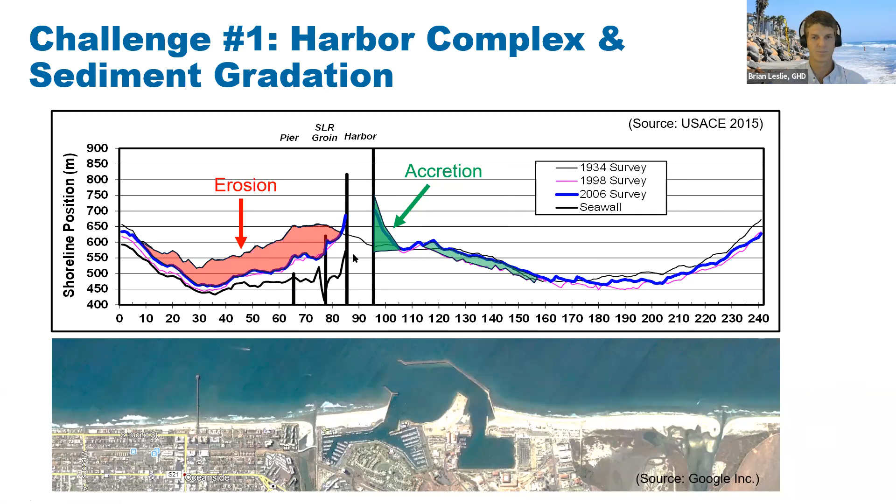Related to this challenge of the harbor complex and its impoundment of sediment is sediment gradation. Sediment gradation is really important to a beach and to having that recreational dry beach in particular. Coarse gradation sand is what you find on these dry beaches. It's heavier, bigger diameter particles that are not as easily moved by waves. Fine sand exists below the mean lower low water, so in the surf zone and near shore, where the wave and current velocities are less, so the sediment drops out.

So what we see in Oceanside is that coarse grained sediment is not making its way down past the harbor. It's not making its way to city beaches. The fine grained sediment dredged by the Corps each year is adding to the beaches, but it's really only adding to the submerged profile, the surf zone and near shore profile.

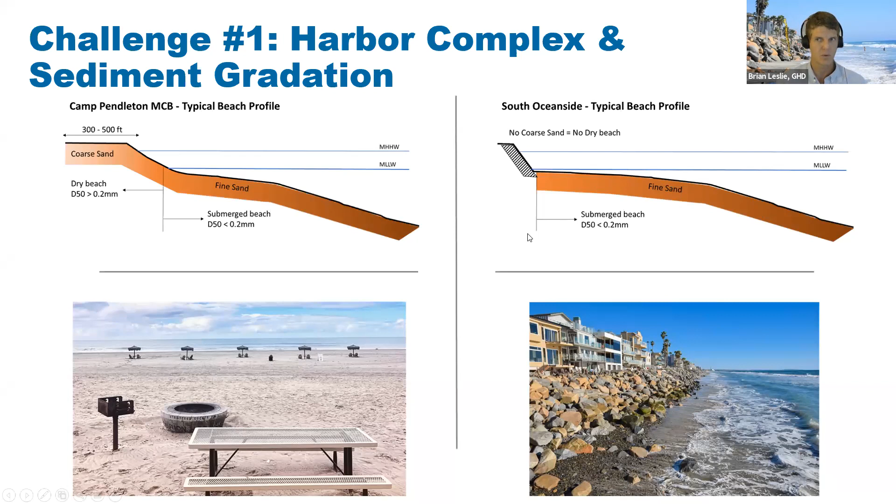So more on challenges around the Corps' maintenance dredging program in challenge number 2. There's a number of things going on with this harbor dredging program that creates challenges. We found that the sand from this program does little to really benefit the city beaches. Several reasons for this. First has to do with sediment type, which we just hinted on. A lot of fine-grained sediment is coming out of these navigational channels. With beach building, size of the particle matters. The coarser sediment stays on the dry beach. Finer grained sediment moves offshore and into the surf zone and near shore.

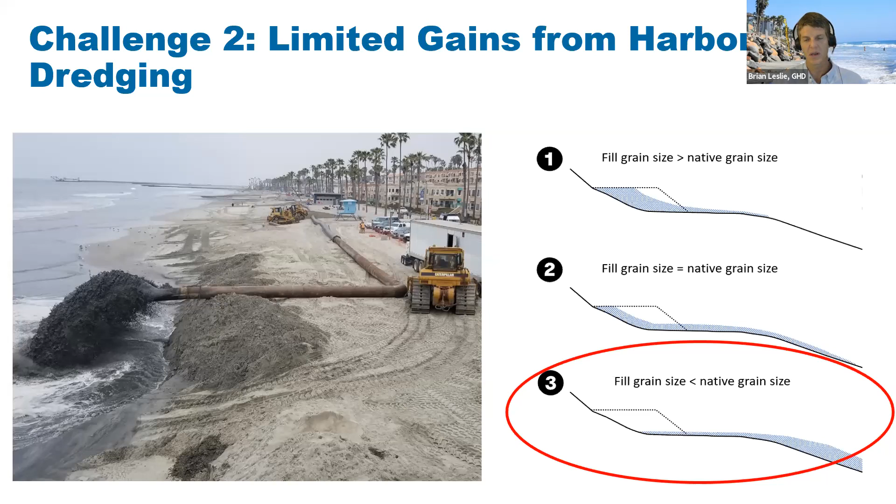Related to this, but definitely secondary, is the placement method. Every year, the Corps places the material in the surf zone via this pipeline slurry mix, which is about 80% water, 20% sand. The slurry is allowed to flow freely into the surf zone and then is scraped up by dozers immediately downdrift. Typical beach nourishment projects interested in beach building have training dikes that act to slow the water velocity and have the sand drop out on the beach, and then manipulate the sand into a profile. The Corps doesn't do this for a number of reasons, but it's a contributing factor to why these gains don't happen from the harbor program.

The other big challenge, or reason why we're not seeing a lot of gains from the harbor dredging, has to do with the timing and placement locations. So sand is placed typically within the spring. They dredge in the spring and place within these variety of locations.

They struggle to make it too much south of the pier, but this is coincident with the change in the wave climate. The climate changes from a north dominant swell direction to a south dominant swell direction. So these waves are pushing sediment to the north during this period of time. So what you're seeing is kind of like the circular flow of sand within this northern segment of the city, and you're not really seeing the benefits to the south.

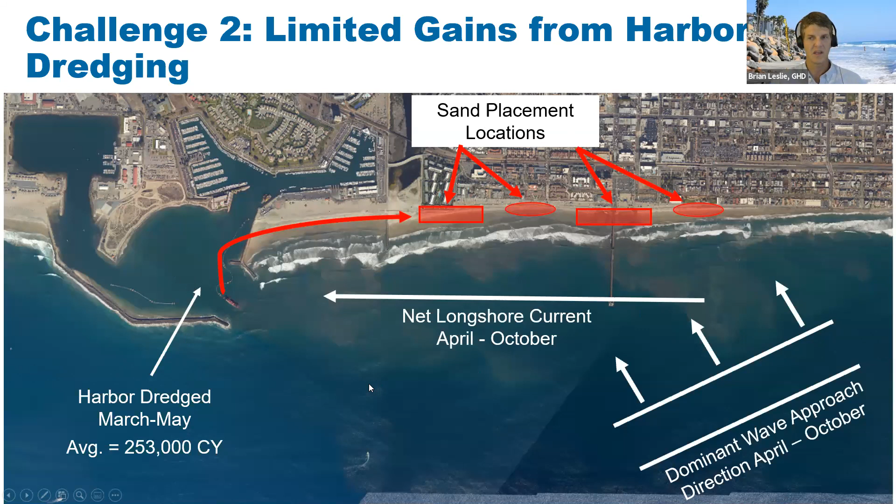The third challenge we came across was a poor performance of the regional beach fill program. The regional beach sand project, carried out by SANDAG in both 2001 and 2012, brought really great sand to a lot of beaches within the county. And Oceanside was no exception.

In 2001, the city got 400,000 cubic yards of sand. And in RBSP2 in 2012, the city received 300,000 cubic yards of sand. Really coarse, good sediment, so good for building beach space. So this is just kind of an intro to that project, and then we'll get into how these fills performed over time.

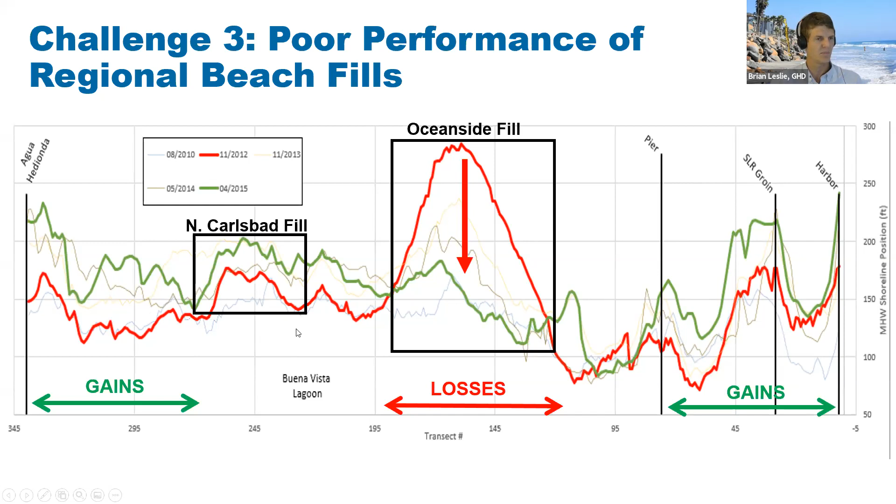So there's some gains in the harbor area, Harbor Beach, and by the San Luis Rey Groin, but also significant gains within the North Carlsbad area. Those gains are still actually being realized in Carlsbad. It seems like the beaches are still benefiting from that fill 10 years later.

A closer look at that area and why we think that's happening. What you have at Carlsbad is these jetties at the Agua Hedionda Lagoon, which effectively act like groins in interrupting sand transport. So the coarse grained fill would basically move down the coast and was retained by these jetties.

Beaches in North Carlsbad, like I said, are still benefiting from this project. 10 years later, we're seeing this accretion of about 3.6 feet per year since 1990. I know this is generalized across that time, but again, these beaches are doing really well. And it's kind of a nod to how retention can act within this system.

The fourth challenge is really kind of a softer challenge in that the city, like other coastal cities, has difficulty in reaching social, political, and regulatory consensus around management decisions. And so this is not the first study to look at and recommend sand retention as an option for Oceanside. It's actually like the fifth or so. Challenges and competing interests amongst the community, stakeholders, and resource agencies have precluded sand retention from moving forward.

The experimental sand bypass program, which we've talked about in past meetings, was a result actually of a sand retention option, this preferred groin option that was put forward by the Corps in the 80s, being shot down by the community and political and regulatory constraints. So the experimental sand bypass project was a compromise, and this 9 groin option was preferred. And this system, as everybody probably knows, was deemed a failure after a few years. And that was a result also of entities not working well together.

So this project was not able to touch the Marine Corps property or impact their operations, which really tied the hands of the project team of where they could source the sand. So this led to the project sourcing sand in the surf zone off of the North Breakwater. And this was an area that didn't recharge with sand very quickly. So that was one of the major constraints of this project and why it failed.

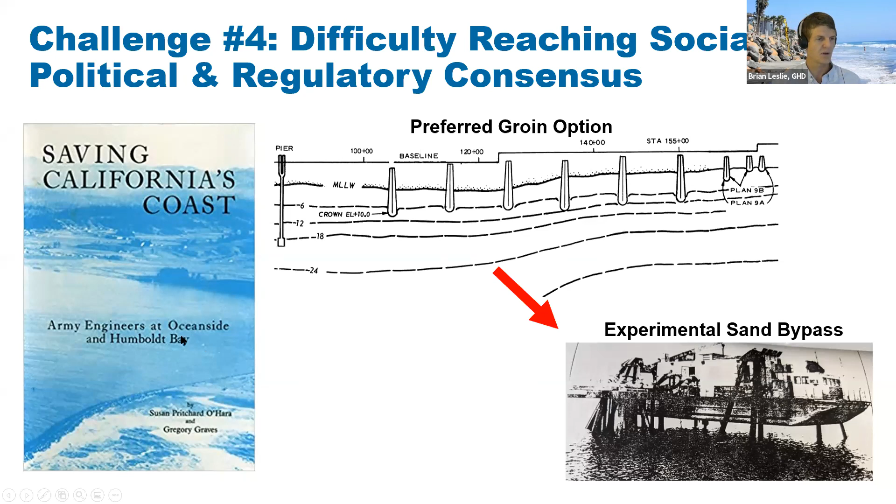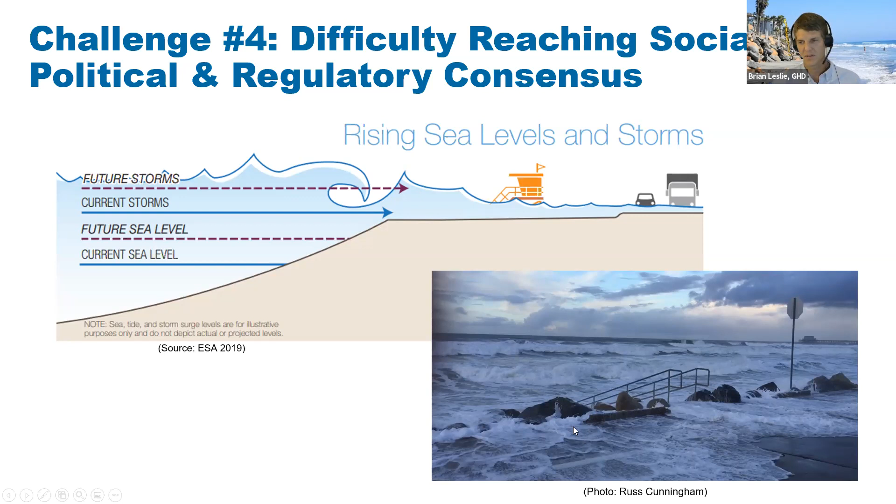And we totally get the difficulty in making these decisions within these coastal communities. There's trade-offs with each of these options. There's big costs sometimes, and there's difficulty to predict some of these impacts with accuracy. But given the state of beaches today in Oceanside and sea level rise projections moving forward, it really seems like we need to work together to build resilience in these communities and start making these tough decisions. Continuing to do what we've always done is not going to sustain our beaches.

Okay, so on our project and our project approach, and recognizing these project challenges, we've designed it to start small and build with success. So we've got this pilot project approach. We want to be adaptable and reversible, so designing with that in mind so that we can offset impacts.

The project would be informed by a robust scientific monitoring program that we've already started to spin up, that Laura will talk to you about in a second. So we've got a baseline established and the citizen science program that Laura will speak to. And off to you, Laura.

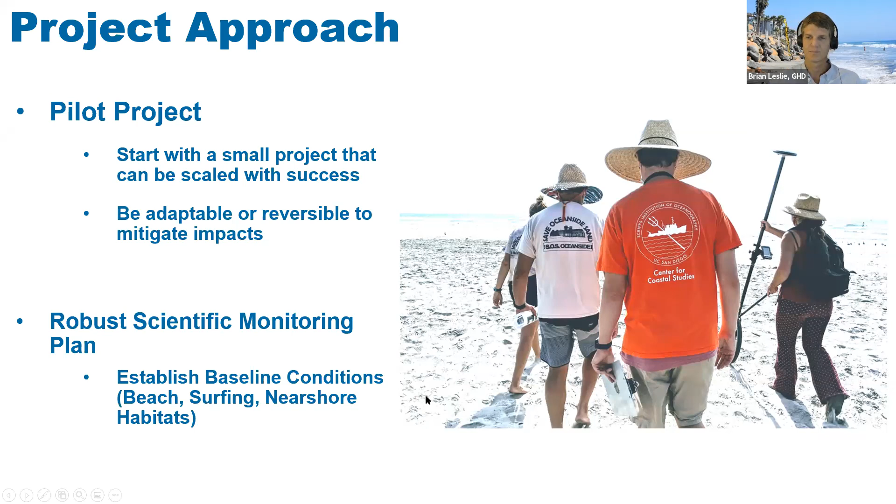Great. Thanks, Ryan.

So from the Scripps perspective, we've been looking at what kind of information we can bring to light in terms of what the baseline conditions are at the Oceanside beaches. As an institution, we have expanded our capabilities of doing shoreline surveys all the way through North County more recently. And so we now do quarterly or biannual surveys through Oceanside using our LiDAR, laser detection system that essentially provides high resolution surveys of the beach area.

And then to supplement for this project, we did bring a crew up in January of 2021 to get the surf zone and the nearshore area in addition to the LiDAR so that we could really get the full beach profile in terms of a baseline condition. So that was provided to the project team. And we will continue to do the biannual spring and fall LiDAR surveys through Oceanside to continue to track change there. I think next slide.

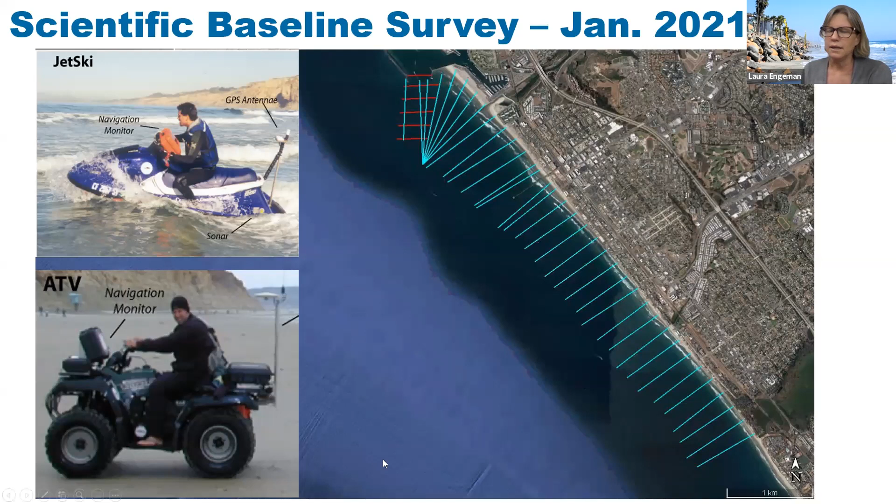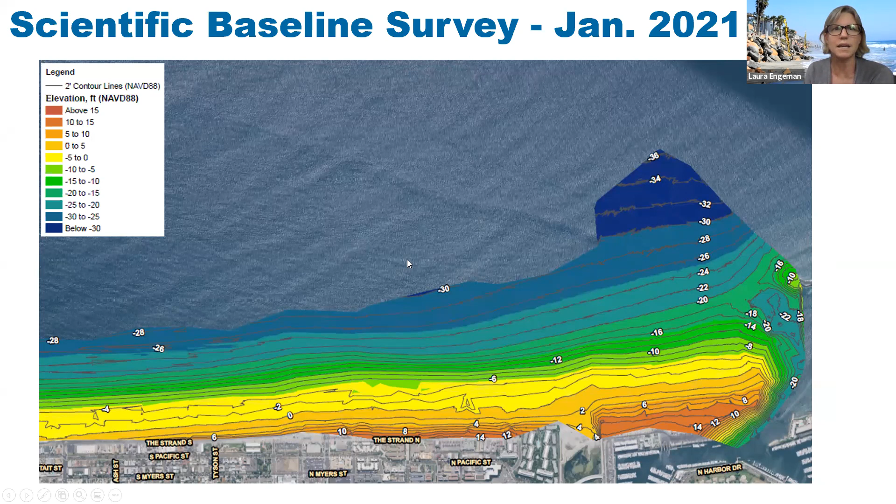So in addition to that, as I mentioned, those surveys are only done twice a year. Oh, and we have the slide. So we're looking at what we call the jumbo survey, which is essentially the complete beach profile going all the way from the back shore of the beach all the way offshore. And again, this is to help with understanding what kind of sand volume and sandbars are really building offshore. And as you'll see in the monitoring report slide, doing this kind of survey would be really important to any sort of sand retention or nourishment project to understand where the sand is going alongshore and offshore.

So then in addition, to capture a little more consistent data on change and fluctuation in the beach in Oceanside, we worked with the community group SOS to provide them with some handheld GPS and approaches and transects so that they could do monthly surveys, which they can then add to our biannual or quarterly surveys in Oceanside. So we've been compiling this data, tracking both the seasonal and now the annual change in the Oceanside beach conditions. So there you see the cross-shore profile that we have so far from, I think, late 2020 to today. Essentially the last one was in April.

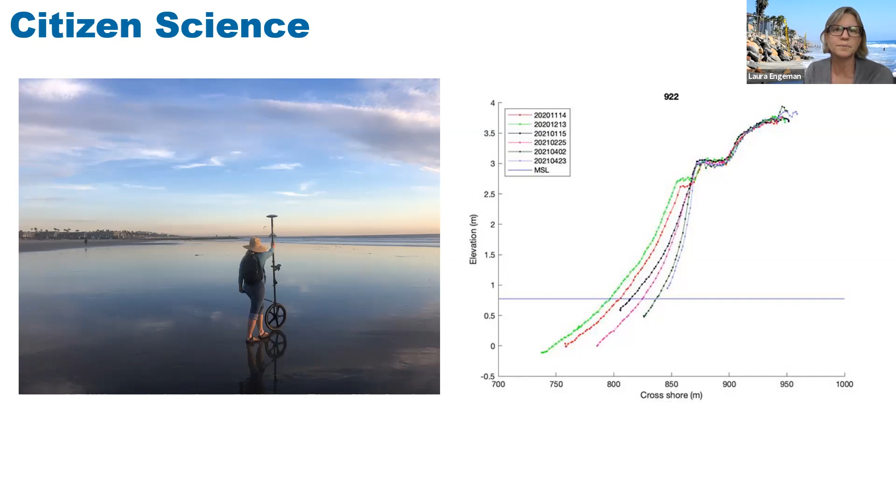And then the last piece that we're working on is really outlining what the main components of a monitoring plan would look like. So without any specific project in place, this is looking at any typical sand retention or nourishment project, but really thinking about the change in beach width and volume compared to those baseline conditions. So tracking the beach building and the beach resilience, and then downdrift impacts, so where that sand is going. And in particular, looking also at response to storm events. So seasonal and annual monitoring is really key to understanding those seasonal changes and potentially the bounce back of the beach from year to year.

But then response to storm events is also a critical component of understanding whether or not sand is actually being retained during these storm events or whether there's significant beach loss still occurring. And then the recreational impacts would be looking at what happens in the near shore in terms of sandbar buildup or impacts to the active and passive recreation activities.

And so there's a combination of tools that we can use for this. As I mentioned before, using your standard GPS survey technology to get the volume of sand or the elevation of the sand along the beach as well as the beach width. Using the high resolution tools for capturing the high resolution beach profile all the way out into the surf zone. Video cameras may be possible for capturing long-term video monitoring of the beach, but also potentially post-storm monitoring and field conditions, as well as community surveys to monitor after those storm events in particular, or maybe just monthly as we've been doing so far.

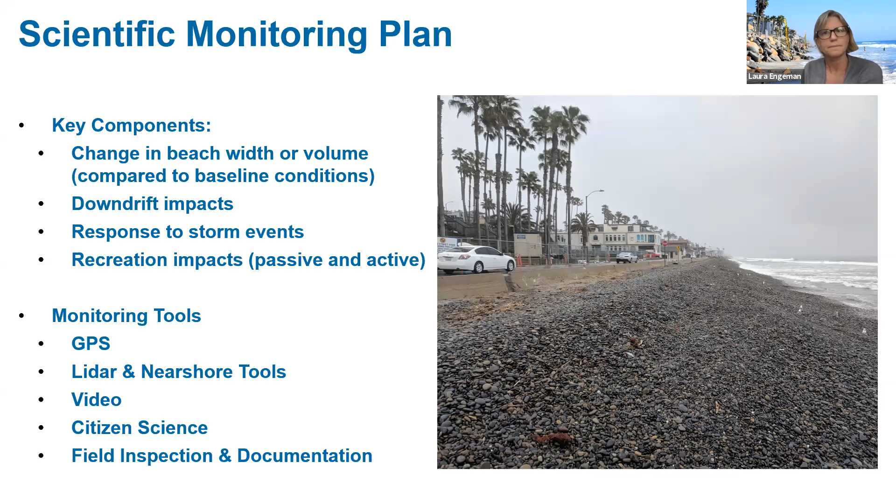And then field inspection and documentation, again, really would be a bit more critical around that post-storm event or post-high wave event to really see how the interaction of the beach is happening and what sort of losses and sand movement you might have seen. So with that, I'll pass it back to GHD.

Perfect. Thanks, Laura. So now we'll get into the project alternatives. And we have 4 action alternatives: beach nourishment, groin, the South Jetty or San Luis Rey groin extension, and a reef pilot. I wanted to mention that the sand distribution options are still coming, but we recognize within each of these action alternatives, we need a lot of good sand. So those are almost standalone and they go with any of these options. So they're talked about after we evaluate these action alternatives.

Each of these action alternatives is compared against the no project, which is the status quo of the harbor program doing what the harbor program does, and the city continuing to participate in regional programs on like a 10-year basis. Again, we compare these action alternatives against the no action for comparative purposes and context.

We want to present what we consider our pilot reach. We want to acknowledge that more refinement is needed to pin this down, but this is the segment that we think makes the most sense at this time. First, what it is: as everybody probably knows, it's basically Sea Gaze down to Wisconsin.

So alternative one is beach nourishment. It is essentially the Regional Beach Sand Project 2 conducted on a more frequent basis. So it's 300,000 cubic yards placed every 5 years within this exact footprint that was used in RBSP 2. The gradation of the sand would probably have all the same parameters. The life cycle cost for each of these alternatives is presented, and that's basically the cost of an option over a 20-year period. So the life cycle cost of this option is about 28 million. This assumes sand from offshore at this point.

Considerations with this option: based on what we saw from RBSP 1 and 2, we can't really bank on having a great dry beach from this program, and based on the performance of those fills, where that sand goes is a question mark within the city. So we might not have it where we want it most. A benefit is that downdrift impacts are not really a thing. What we're seeing here with RBSP 2 is actually a downdrift benefit, big gains within Carlsbad.

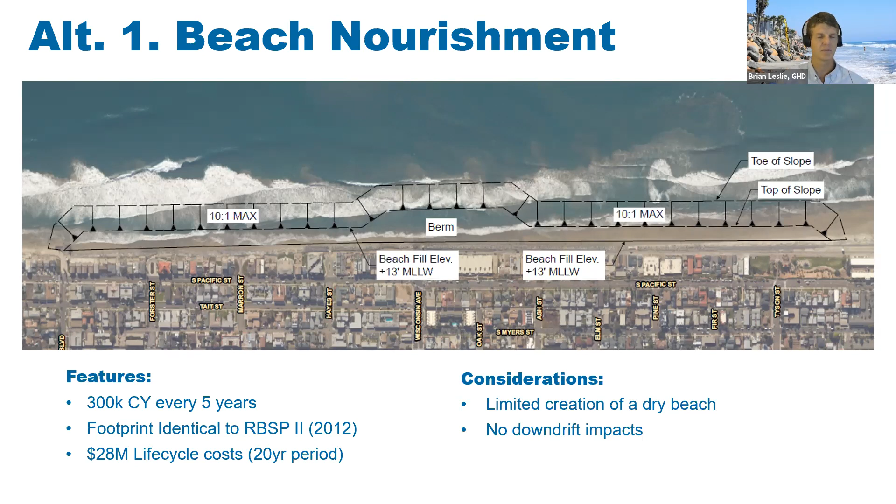Second option is a pilot groin field. We're recommending 4 600-foot long groins along the pilot reach. This option would include a beach nourishment pre-fill, so an initial fill of 300,000 cubic yards. But then because of the benefits of the retention of sand within the structures, we could reduce the fill at that 5-year interval to 150,000 cubic yards. And this is based on our findings from the numerical modeling.

The life cycle cost for this option is 51 million. That includes decommissioning or taking out of the structures at the end, or significant adaptation, I believe, or removal. As far as considerations, these are all the ones we've talked about before: the downdrift impacts, potential surfing impacts. These are all things we'd be looking at and fine tuning within the monitoring plan and the design to try to mitigate these impacts. Other things to think through with the design would be lateral access, making sure that people and also emergency vehicles can move across the structures, laterally on the beach and to the beach.

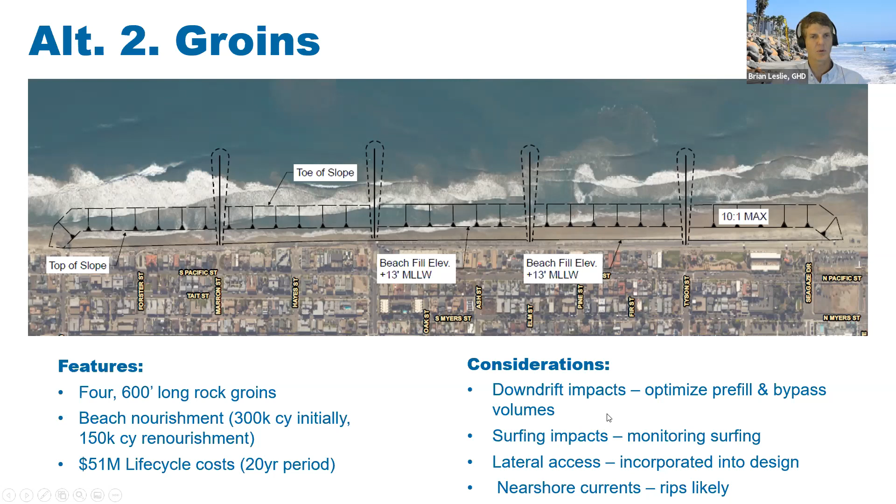Rip currents are likely with groins or any type of coastal structures. That's something people are pretty used to, and there are ways to manage it, but it's something to consider. The third option is to extend the south jetty or groin 350 feet offshore in combination with nourishment similar to RBSP 2.

So 300,000 cubic yards is placed initially and then is also placed at the 5-year recurrence interval. So the idea behind this option is that we're placing the sand here, but we're hoping to catch it before it gets into the harbor, so this option would be coupled with a bypassing option or backpassing option where trucks would capture the sand at the San Luis Rey groin and bring it back down the beach, or maybe there's a mechanical system that's deployed, like the sand distribution options that we'll talk about in a second.

This option is $36 million over the 20 years. And then key performance considerations with this option are the performance. Similar to the nourishment option, we can't really accurately predict where this fill is going to go. And we're going to have to continue to manipulate it to put it back where we want it, potentially. And the potential for surfing impacts from the extension of that groin or South Jetty is unknown, but that's a known surfing resource. It's a popular resource within the city, so it's something that's sensitive.

The fourth option is multi-purpose artificial reefs. We're proposing 2 emergent rubble mound breakwaters with submerged surfable edges, each structure being about 1,000 feet long. Beach nourishment is proposed similar to the groins, 300,000 cubic yards initially, and then 150,000 cubic yards at that 5-year frequency, due to the retention properties of the reefs. This is the most expensive option. It's about $148 million over the 20 years.

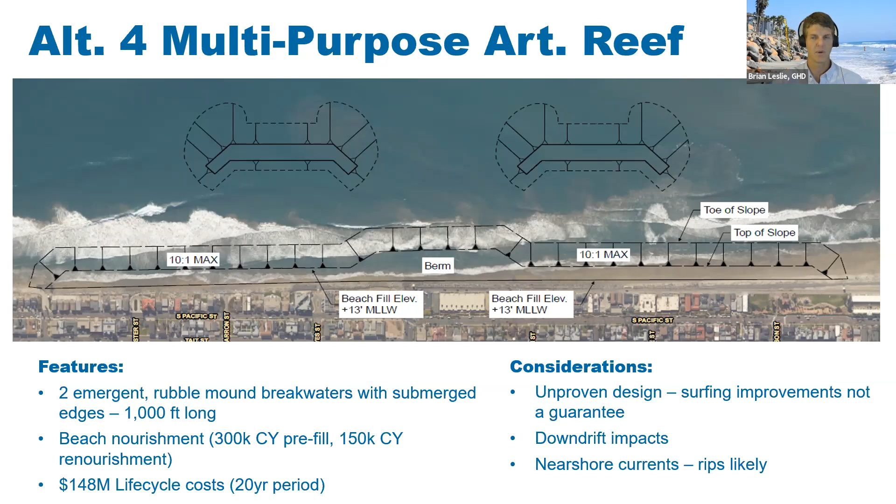Some key considerations are that this design is unproven. The breakwaters we have high confidence in how those would perform. But as far as surfing improvements or the surfable edges, that's an unproven design in Southern California. And so we can't guarantee that surfing would be improved or negatively impacted. Other things to think about are downdrift impacts, and similar to groins, nearshore currents are likely around these structures. So to talk about the numerical modeling and how these options performed, and also how they scored within the MCA or multi-criteria analysis, I'm going to hand it off to Aaron Holloway.

Thanks, Brian. We used the littoral processes and coastline kinetics model, known by the acronym LITPACK. It was developed as part of the MIKE suite of modeling applications by the Danish Hydraulic Institute. It's a one-line model intended to simulate shoreline evolution over the long term, and is specifically designed to compare these different types of coastal structures to one another. So it made sense as the first look at some of these alternatives. The model domain stretches from Oceanside Harbor down to Agua Hedionda at the south end.

The first step was, we set up the model, and then we looked at the RBSP2 project for a validation run to see how the model simulated observed changes from the Oceanside fill and North Carlsbad fill. And the model, to be honest, didn't have perfect agreement with the measured results, but that's expected. This is a one-dimensional model that takes a very complicated system and simplifies it down to a calculation of sediment transport rates at different points along the shoreline, and then adjusts the shoreline accordingly. So it's developed for use all around the world, not specifically the West Coast.

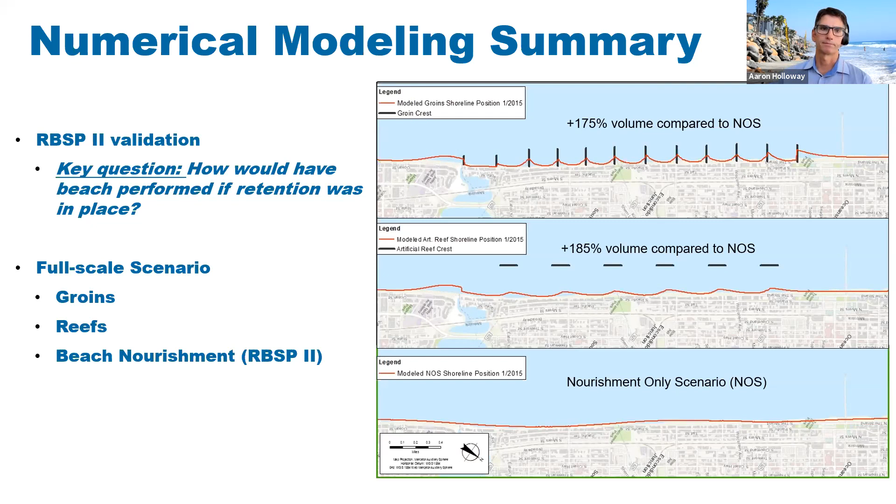So we took that modeling reach and we focused it down to a shorter length of coastline called the pilot reach. So we're looking at about a 1 mile segment of shoreline. You can go to the next slide. And then this one lays out the pilot groin.

So we have 4 groins as shown on the earlier slide, and we run the simulation for this shorter shoreline segment. The results shown at the top illustrate the beach width changes, and they show significant beach gains at each of these groins. They also show downdrift impacts. These results aren't surprising; they show what you'd expect for a groin system.

The model is not precise, so we don't expect these maximum beach widths of 300 to 400 feet, but we do expect them to retain sand. As a result, there could be some downdrift, localized impacts that would need to be monitored and mitigated. The project, in future phases, would be looking closely at how those impacts could be mitigated.

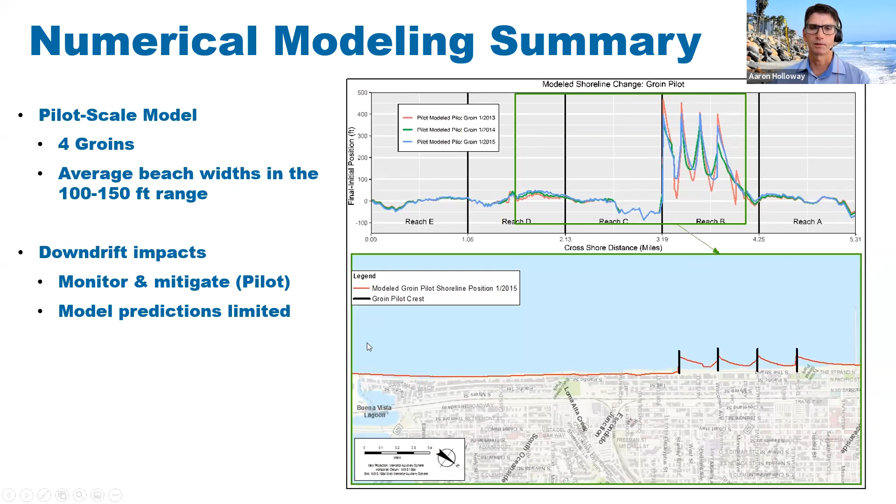We also looked at the series of reefs in the pilot scale, so we looked at 2 reefs in that same location. The model predicted again significant beach width gains over the simulation. In this case, 2 emergent reefs were modeled as offshore breakwaters in this scenario and showed significant accretion behind and updrift of these structures.

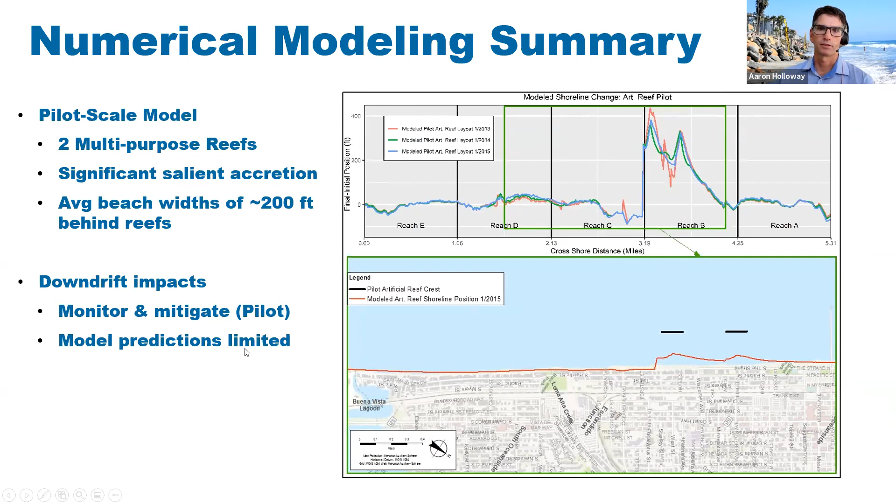It's an important thing, when we're talking about beach width, how much do we need and what's an ideal beach width? A lot of the beach widths reported from the SANDAG projects are relative to mean sea level. Mean sea level is underwater more than half the time, with the wave activity on top of your static water level. A 50-foot mean sea level beach width really means there's a low tide beach at best, and there's not enough dry beach area with this kind of 50-foot average.

That's what was observed over 5 years after that RBSP2 project. The average beach width gain along Oceanside was about 50 feet, and that's about what you got: a low tide beach in front of the revetment over that time period.

Whereas early on, soon after the fill was placed in May, you have this 140-foot MSL beach width, which provides roughly 100 feet of dry beach. That's really the kind of target for a sand retention concept: building a beach that's 100 to 150 feet in width to support this upper dry beach area for recreation, for storm protection, and also for sea level rise adaptability.

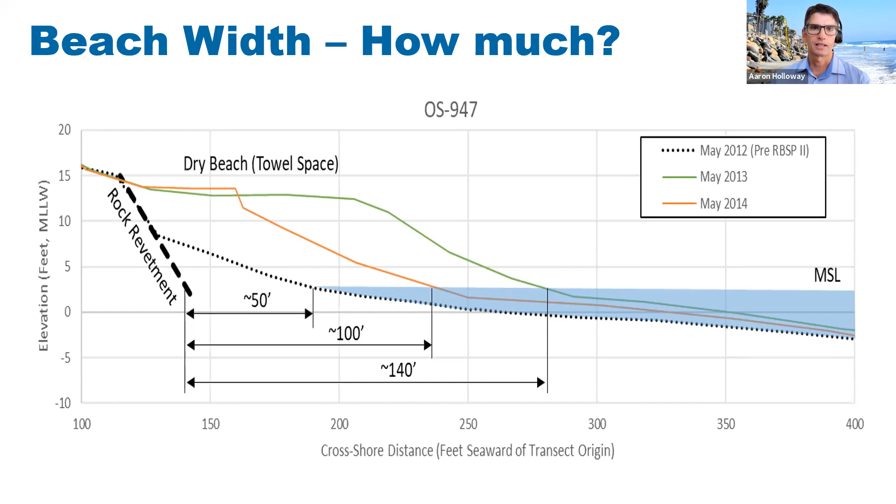Not the same case for the reefs. The reefs require significantly higher volume of material, and so much more expensive. So the value doesn't show up for the reefs, but the groins certainly look like the better value compared to beach nourishment alone.

The next step, once those alternatives were developed and modeled, was to evaluate them against a list of criteria custom developed for the project. They're intended to reflect the interest of the community, and that was reflected in the polling question 6 from the last workshop, where downdrift erosion and sea level rise resilience were some of the top concerns, followed by surfing impacts, costs, and public safety and access.

We took that feedback and developed 11 criteria, organized into 3 categories: technical performance, financial, and environmental. The next slide will show how those different criteria were grouped. Under technical performance, we have the creation of dry beach, downdrift impacts, public safety, and sea level rise adaptability. All of those criteria were each weighted equally at 25%, and altogether make up about 40% of the total score available.

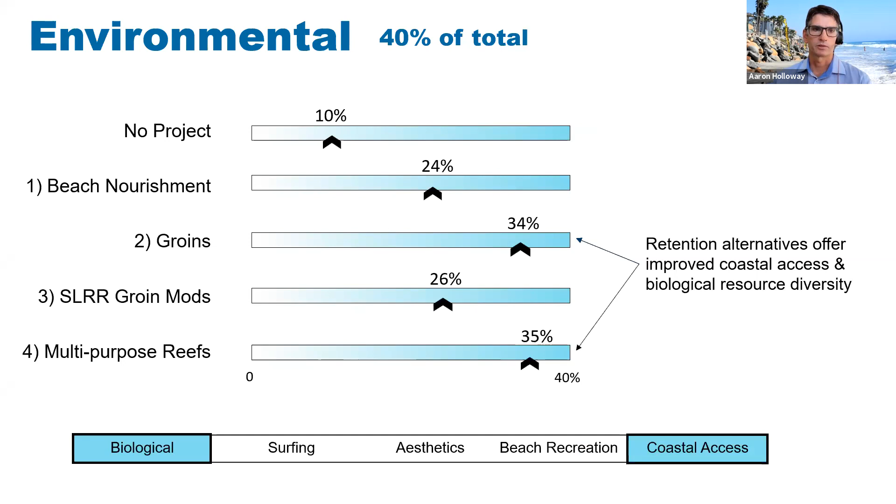Putting all that together, groins is the highest scoring alternative. When considering those 11 criteria, it scored 81% total, followed by multi-purpose reefs at 73%. We looked at this, taking feedback in from the different project team, and considered the sensitivity of the different scores provided to each category. The scores were provided on a scale of 1 to 5. If those change a little bit up or down, it would typically affect the overall score by a few percentage points, but not enough to change the outcome.

We also looked at the category weighting, and if you weighted the categories differently, or if they're all equal—like in this case the top scenario has technical performance, financial, and environmental all weighted equally—we still have groins as the highest scoring alternative. Likewise, if you heavily weighted environmental, financial, or technical performance at 60% of the total score, we still get the same result. So the sensitivity analysis indicates that groins is the highest scoring alternative, regardless of how you weight these different categories or criteria.

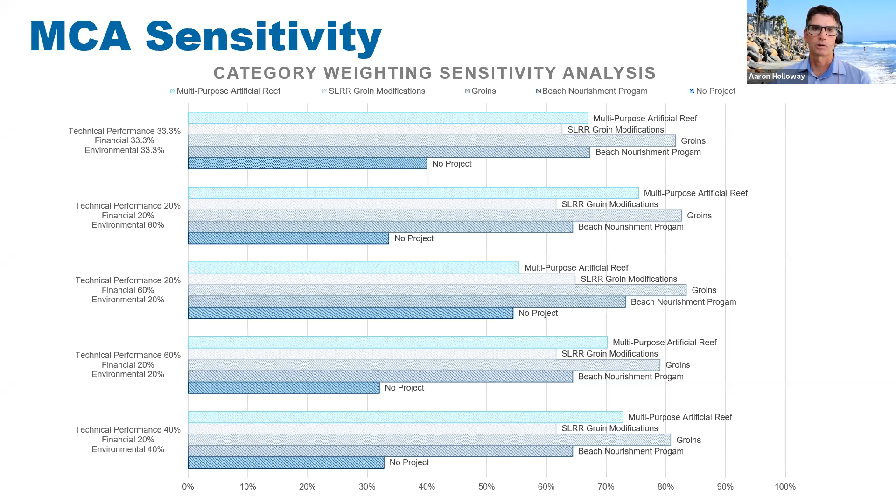So now we're going to get into the sand distribution options. As I mentioned, any of these action alternatives that Aaron just spoke to need sand, and lots of it. The three that we're going to talk about are the fixed trestle bypass, semi-fixed bypass, and a Corps piggyback option, which changed a little bit since the last time we've talked, but it's familiar. We'll go through those in the next couple of slides.

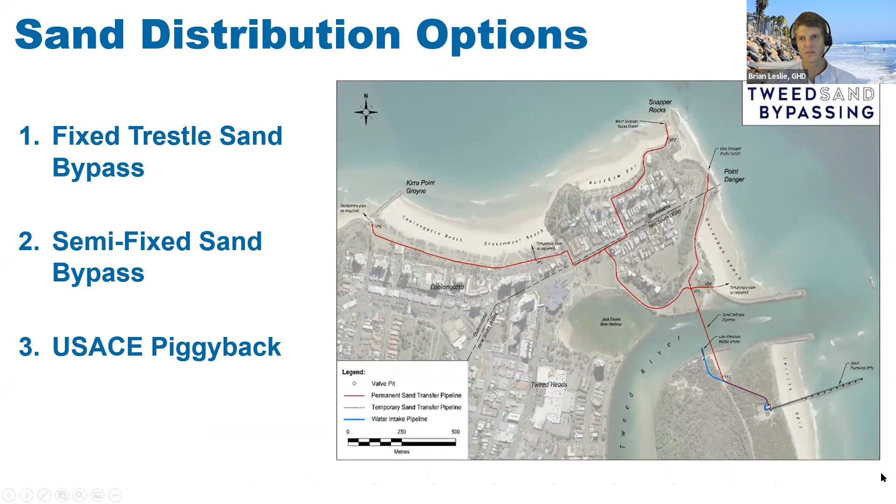That's a recognized obstruction during the Corps dredging program, and that they can't lay the pipe in front of the revetment because there's not enough beach typically. So that's why they place a lot of sand there before moving south. So this would kind of remove that obstruction.

So this system would move the most amount of sand per year. We have an assumed volume of 100 to 300,000 cubic yards of sand per year. This, like the other systems, could be scaled up or down depending on the need. This is an expensive system. It's $36 million initially to construct, approximately, and about $5 million per year in operation and maintenance costs. This would take staff and quite a bit of operation to keep it running well and keep the sand moving down through the system of pipelines.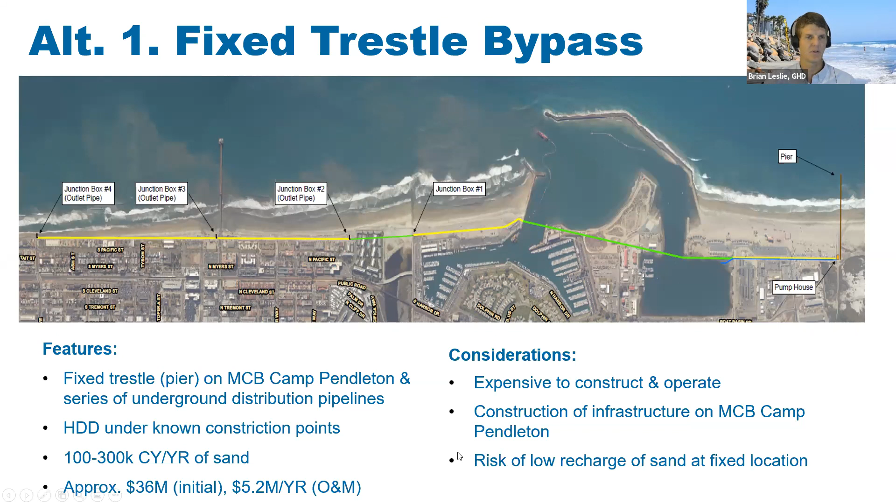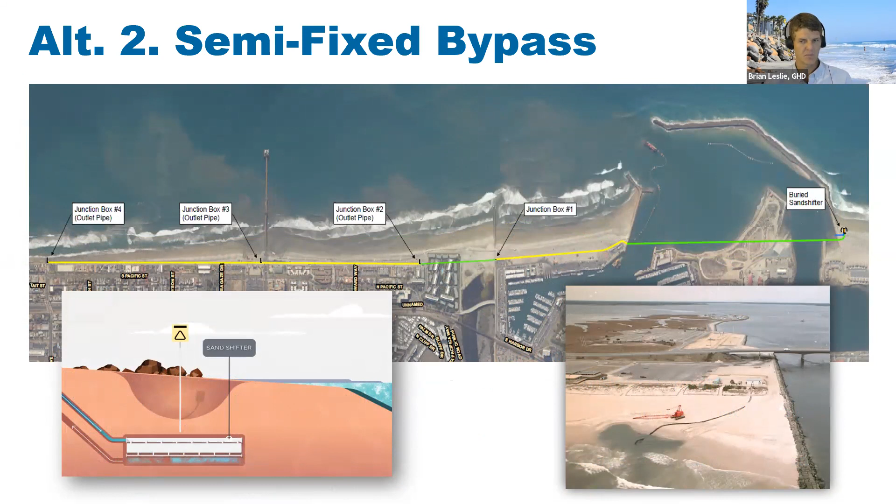So the second system is really to address that concern and others - the semi-fixed bypass system. This would allow some mobility within certain areas to capture sand from different locations on the beach. There are two different systems we've talked about with this option. It's a sand shifter type of system, which is what Australia has a bunch of. They're underground pipelines and catchments that basically aren't visible until you turn them on, and then they make a big depression within the foreshore. So that system's an option.

But another option that we've learned about and gotten pretty excited about, frankly, is the Indian River bypass system, which uses a pump station, a series of distribution pipelines, but then a crane that manipulates the cutter head suction dredge around certain areas. Again, this gives us flexibility to capture sand from where it's in surplus and the best place to grab it in a specific year.

These systems all move less material, about 50 to 100,000 cubic yards per year. The costs are lower, at about $11 million initially - these are rough costs - and about 200,000 dollars per year in O&M. Again, we could scale this based on needs within the city. We have the ability to move, which is a key benefit to the system. But with our eyes to the Camp Pendleton fillet as the highest quality and sustainable source of sand to the city, we're going to require Camp Pendleton's cooperation.

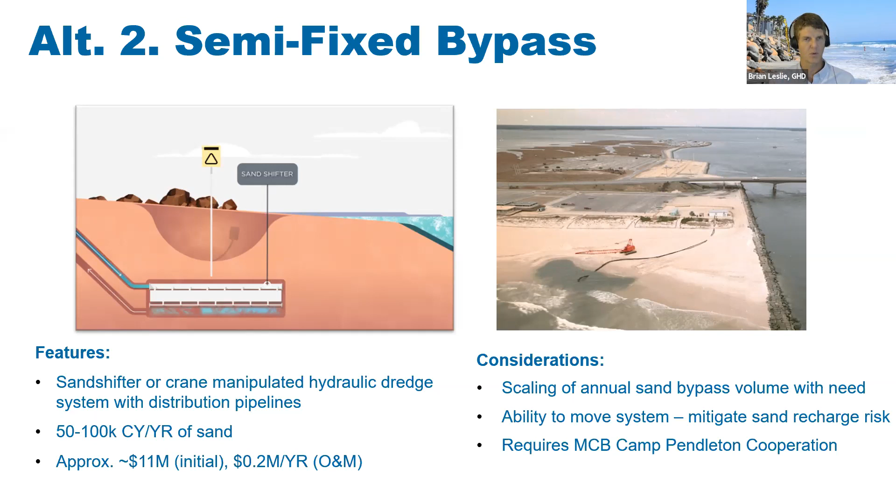So the third option is to piggyback on the Corps program, the Corps Harbor Dredging Program. This is a common thing that people do across the nation. Municipalities or agencies take advantage of the contractor - the Manson or whoever's doing the harbor dredging - being on site, and basically contract with them separately to do a side job, if you will. So what we could do is take advantage of their mobilizations, and the key benefit is that you save on the contractor's mobilization.

So what the Corps or city could do was contract with the Corps dredger to dredge the Camp Pendleton fillet or another high quality sand source and bring it down to city beaches to form that dry beach we've been talking about. That's so important to the city for recreational benefits and also storm protection. This would also be scaled at about the sand shifter or semi-fixed system volume, at about 50 to 100,000 cubic yards per year. The cost would be the lowest of the three, at about $9 million initially, and about the same as the sand shifter, about 200,000 per year to operate.

Some other key benefits to this, and also just to the distribution pipeline system, are the safety benefits during construction. You don't have as much heavy equipment on the beach laying the pipelines. So you have a fixed system in place that you can just flip the switch, hopefully, and get sand down the beach.

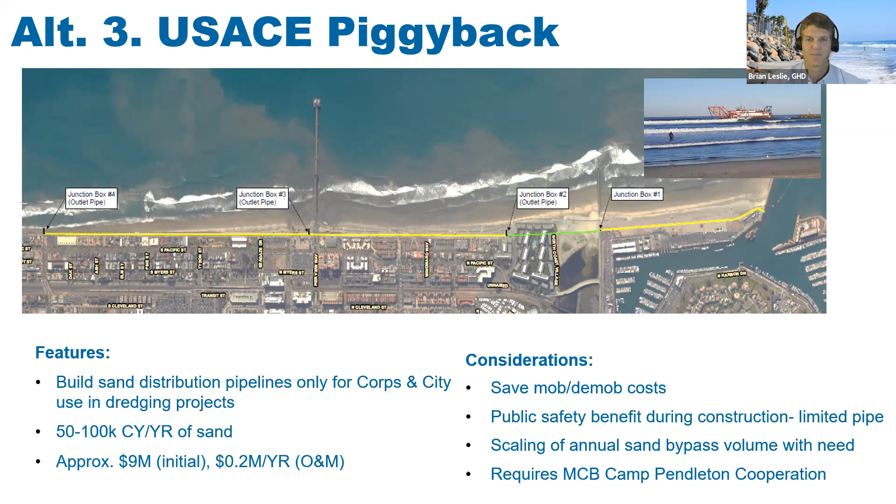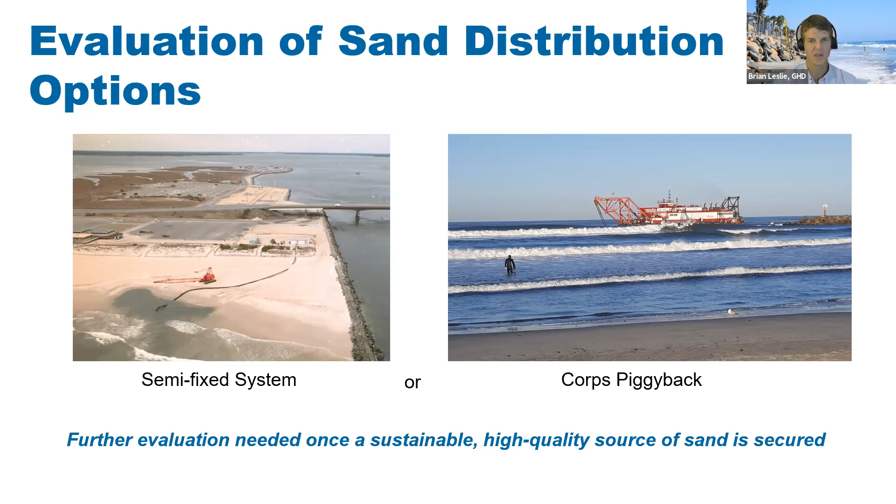So in our evaluation of the sand distribution options, we like the semi-fixed system or the Corps piggyback options. However, we didn't get to the level of detail that we got to with the other action alternatives, because we really got to find that sustainable, high quality source of sand before we take the next step. So getting some assurances from Pendleton or finding something else as far as a high quality source of sand that can be accessed by the city on this kind of long-term basis is what we need before we can kind of take the next step on this.

Okay, to summarize what we just talked about, the city of Oceanside has 4 major challenges. Harbor complex blocks this coarse grain size sand from making it to city beaches. This gradation of sand is really important for that recreational dry beach that the city and everybody's kind of after. It's good for storm protection, but also everything else as far as economics.

The second one is the limited beach gains from the harbor dredging program. We're really not seeing the gains from that program. That's because of the gradation, it's because of the timing and means and methods of placement, et cetera.

The regional beach sand projects, though not to discount them too much, it was definitely good for the city to participate in those, really didn't perform so well within the city beaches. We really think that's just because of not having that retention in place. I mean, City of Carlsbad clearly benefited from those programs and still continue to have wide, stable beaches.

And that key one is the difficulty reaching consensus and getting people to work together and have a compromise or problem-solving mindset together to come to solutions, which has been something that the city's grappled with for a long time.

The Groin pilot scored the highest based on the MCA analysis. We recommend that project, the Groin pilot, be carried forward to the next phase. As far as sand distribution, we have a little bit more work to do in the evaluation of these options, but we need to figure out that sustainable, high quality source of sand first.